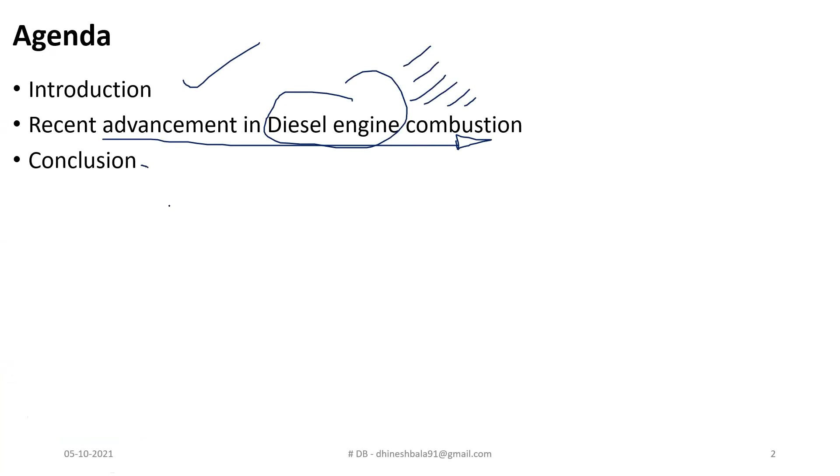Okay, thank you very much for this brief introduction. I would like to thank the management, principal, head of the institution, and the organizer for giving such an interesting opportunity to explore my perspective on advanced diesel engine combustion for clean combustion. The overall session is scheduled in this fashion: we will start with a brief introduction, followed by a walkthrough of recent advancements in diesel engine combustion and various concepts lying within advanced diesel engine combustion, and a brief conclusion.

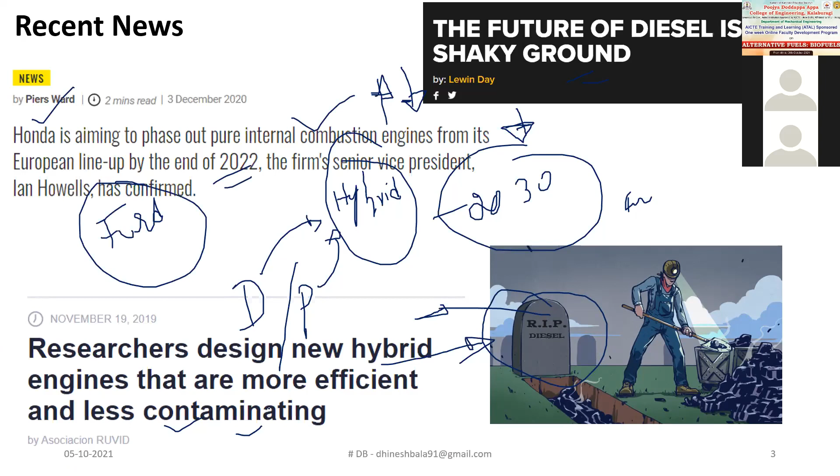Honda is aiming to phase out its pure internal combustion engines from the European lineup by 2022. You might have heard about the news related to Ford -- they have completely stopped production based on internal combustion engines as of now, and sooner or later Honda is also going to join them. All put together, they have started to signal the decline of the internal combustion engine at this point in time. Volvo added mild hybrid and plug-in hybrid vehicle models for all its variants, so sooner or later it is going to be for all vehicles.

In 2010, the internal combustion engine was ruling the entire automotive market share -- it was the only one ruling the entire market. But as the years went by, you can see the internal combustion engine slowly start to get phased out, and the role of hybrid vehicles and plug-in hybrid vehicles would start to play a key role. So it aligns with that.

As of now, we are in 2021. So by 2021, the penetration of hybrid vehicles should have initially started to reach a minimal percentage.

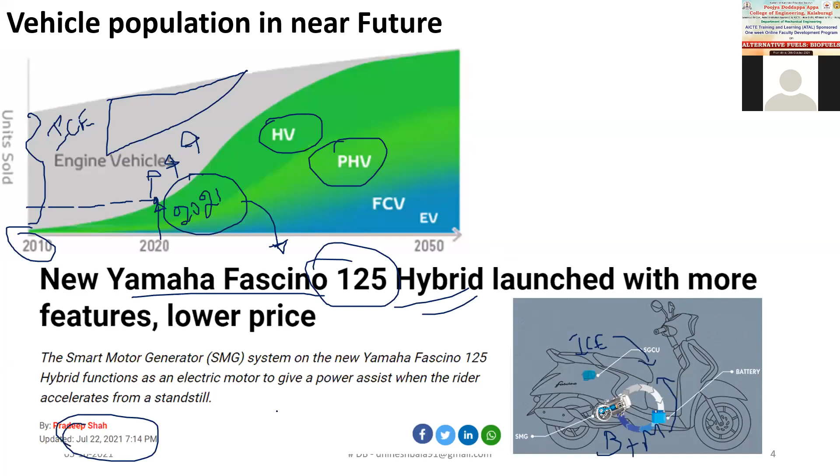In line with the statistical data I mentioned earlier, the Yamaha Fascino 125 is coming up with a hybrid vehicle mode. The term hybrid vehicle mode means it will have both an internal combustion engine and a battery-plus-motor combination, so power would be delivered from both the internal combustion engine and the battery-plus-motor combination. This news was out by July 2021. This statistical data is very much in line with whatever recent research and recent market share is happening as of now in India.

So after 2020, the penetration of hybrid vehicles and plug-in hybrid vehicles would...

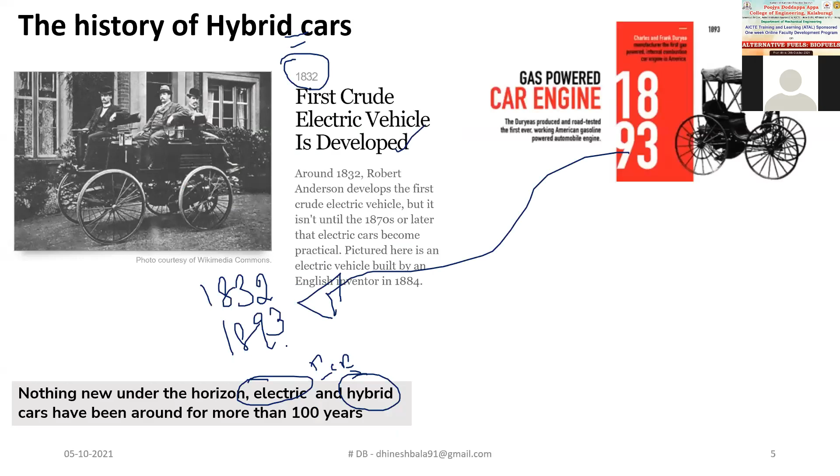It was in 1901 the first hybrid vehicle was introduced. If you just see all three vehicles' origin, it has been close, more or less in the same time scale. It was either in the late 18th century or the early 19th century. So the internal combustion engine, hybrid, and electric vehicle have started their origin around the same time, but somehow the internal combustion engine was ruling the entire market field for the past 100 years, from the 19th century to the 21st century, for more or less above 100 years.

But after that, people slowly started to transition from the internal combustion engine to either hybrid or electric vehicles. Even though the hybrid vehicle was introduced to mankind in 1901, it was in 1997 that the first mass production hybrid vehicle was initiated. The first mass production hybrid vehicle is nothing but the Toyota Prius, which was mass produced around the year 2000.

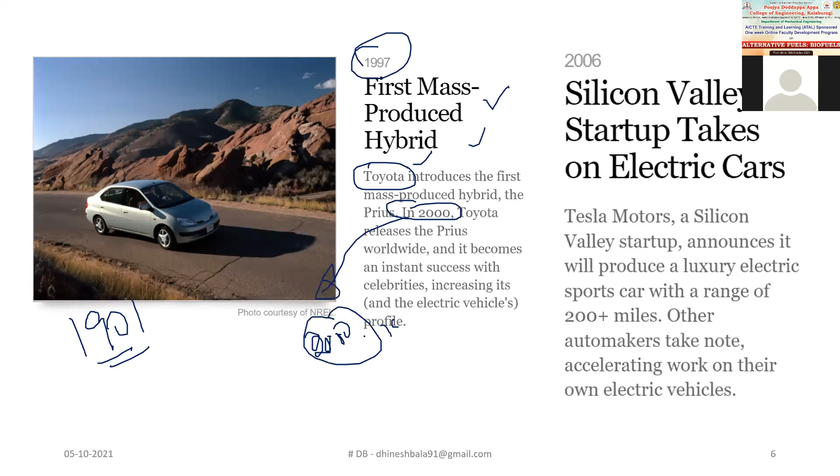So for the past 100 years, only the internal combustion engine was ruling the entire world. And after that, the hero of the electric vehicle comes into the picture. It was in 2006 that a Silicon Valley based startup made a very big statement to the entire automotive market field. This is nothing but Tesla Motors, a Silicon Valley based startup at that particular point of time.

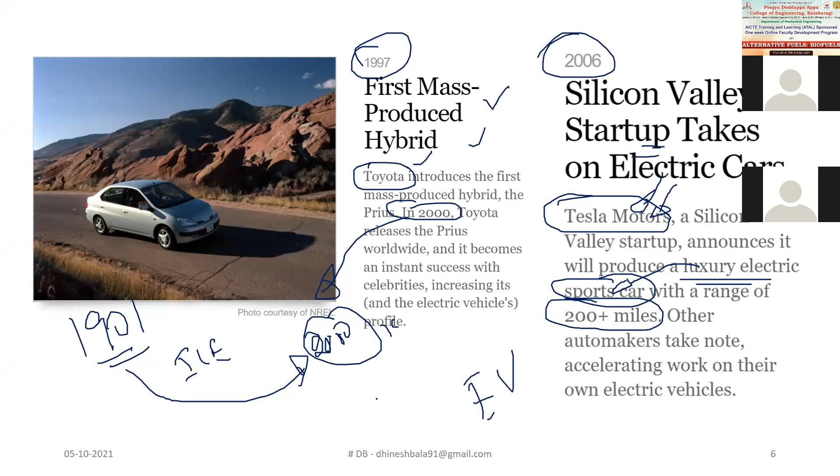This encouraged other automotive manufacturers to start working on their particular EV or hybrid vehicle variants. So this is all about the history of either the internal combustion engine, the hybrid vehicle, or the EV.

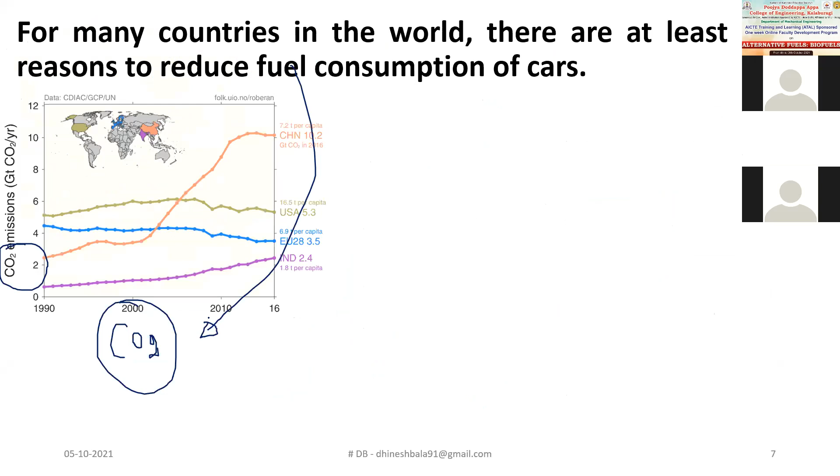So in many countries in the world, there are at least three reasons to reduce fuel consumption for cars. One major reason that strikes our mind is nothing but CO2 emission, which is a major threat in every nation as of now. When talking about fuel consumption, people more or less talk about carbon neutralization, and India is one of the most important countries targeting carbon neutralization.

Apart from that, the import duty of crude oil keeps on rising. Talking about import duty, it is led by China, followed by the US, and India is having a maximum share of crude oil import. So this import rate keeps on increasing and makes an impact.

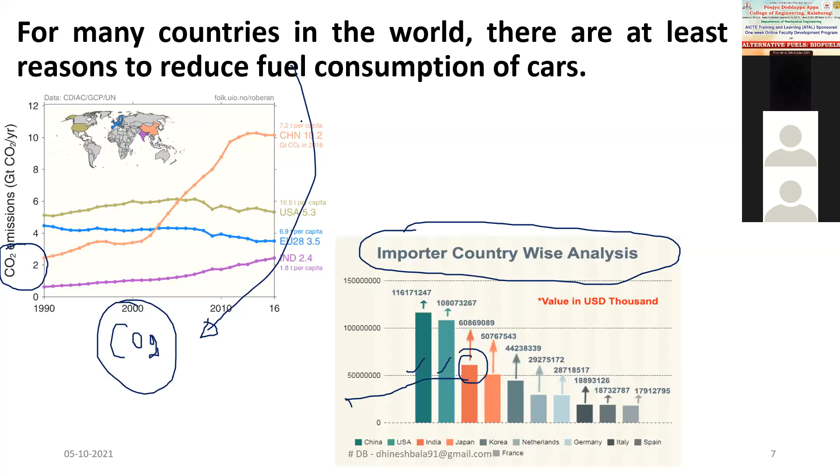So what are the possible ways to reduce this at a particular point? Talking about a pure internal combustion engine, you can rely more on the aerodynamic part of your vehicle, which will have a greater impact on drag, and thereby whenever you reduce your drag, you will have a higher option to increase fuel consumption efficiency.

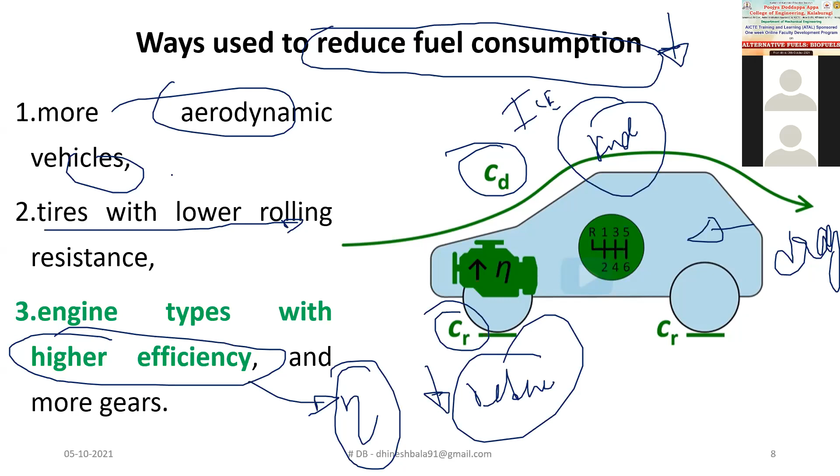The next important parameter is the tire with low rolling resistance, which would have a higher impact. The third one is the engine with higher efficiency. Our slide talks about this particular part where we will be focusing on a high efficiency engine with reduced fuel emissions using advanced combustion techniques in an existing diesel engine. So the possible ways to reduce fuel consumption as of now talk about the aerodynamic part, the rolling resistance part, and the third important key point is the efficiency of the engine.

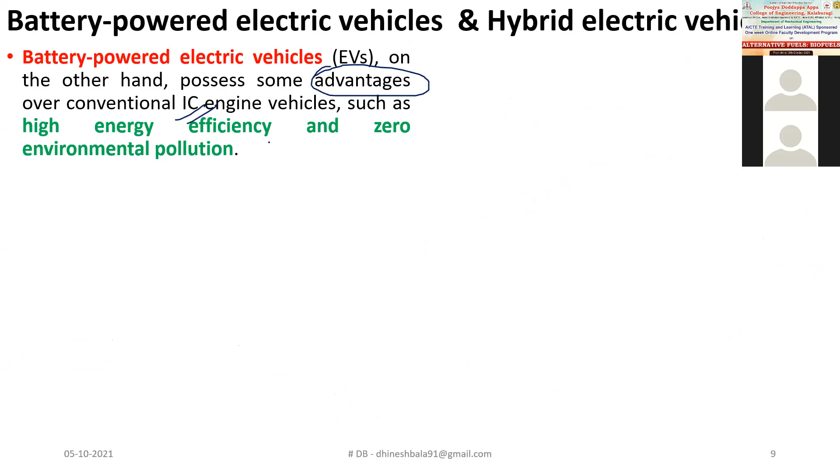So when talking about the battery powered electric vehicle, it possesses some advantages over the existing internal combustion engine, such as high energy efficiency and zero environmental pollution. You should be very clear about the term zero environmental pollution. When talking about the electric vehicle, people are slowly starting to switch from pure internal combustion engine to EV.

So when you switch over from internal combustion engine to EV, the demand for electricity keeps on increasing. When the demand for electricity increases, what actually happens is the demand on the thermal power plant gets increased - the demand for efficiency and reducing emissions.

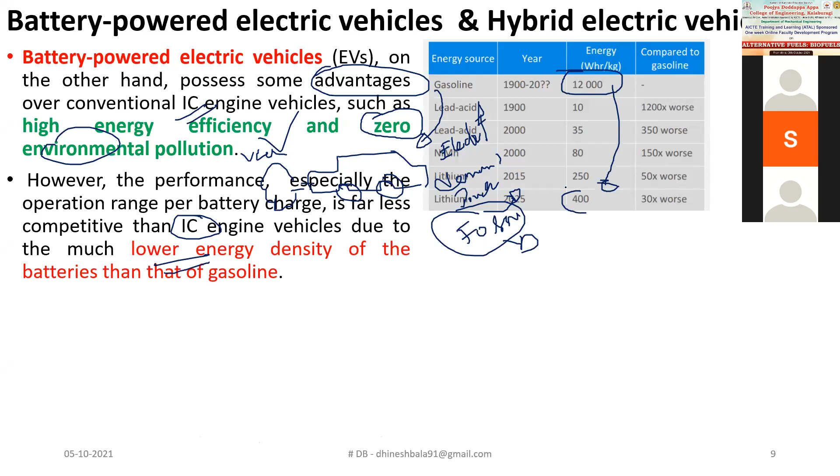The next point is, however, the performance, especially the operating range per battery, is far less compared to IC engines. This results in lower energy density of your battery than gasoline. The energy density of gasoline is enormously high, with no par equal to whatever the energy density of your lithium-ion batteries is. So we should be very much clear about why people have started making use of lithium-ion batteries as of now, because it has a higher tendency to lose an electron, and it would be much more efficient than the other electrochemical series values presently available.

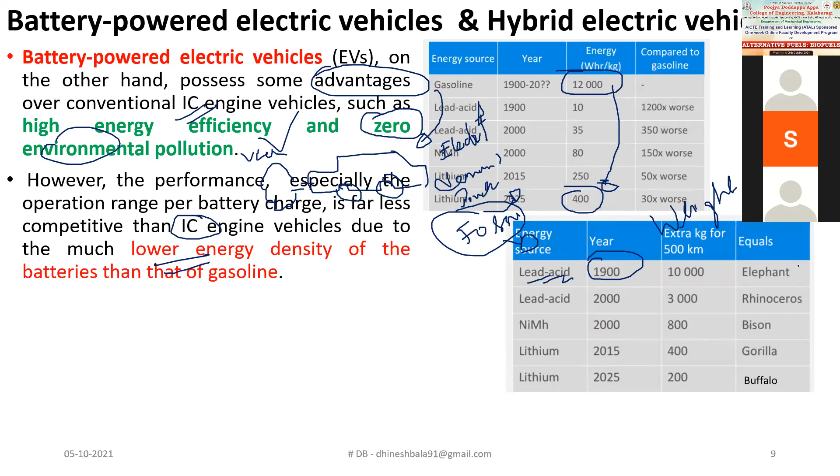Talking about one greater disadvantage, the energy density, the next thing that strikes our mind is nothing but the weight of the battery. In the early 20th century, people started thinking about making use of lead acid batteries. Whatever energy comparative to your internal combustion engine, at the same time it would result in a weight of an elephant that you'd be carrying along when traveling in your electric vehicle at that point of time. Already your vehicle would have a huge weight, because at that point, in the 20th century, there was no drastic material-focused engine design. So weight reduction was not a major concern at that point.

Even so, when working on a battery electric vehicle in the 20th century, it resulted in excess weight of the batteries. This weight of the battery has slowly stepped down from 10,000 kgs to 200 kg as of now. Even now, the battery weight is enormously high, but it is somehow equal to the weight of your internal combustion engine at this point. These are the greater disadvantages that strike our mind when talking about battery powered electric vehicles.

Taking these disadvantages and converting them into useful input, people started thinking about making use of hybrid vehicle technology. A hybrid vehicle uses two power sources, one is the primary power source and the secondary power source. The primary power source is always the internal combustion engine, and the secondary power source is your battery plus motor combination. This compensates for the disadvantage of your internal combustion engine, and you're able to enjoy the advantage of your battery powered EV.

Talking about the types of EV, it can be classified as a hybrid electric vehicle. This hybrid electric vehicle is further branched out as series, parallel, and a series-parallel combination. In a hybrid, you use two energy sources: one is the fuel plus internal combustion engine combination, and the next is the battery plus motor combination. In a hybrid vehicle, for refilling, you'll be making use of a petrol pump, and obviously you will also have a battery plus motor combination.

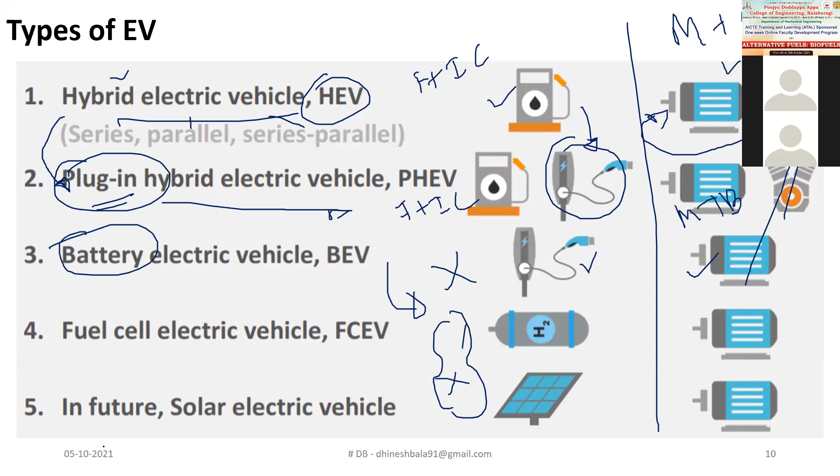When talking about the hybrid vehicle, it is mainly classified in terms of two parameters: one is by the degree of hybridization, and the other is by the energy flow.

Hybrid vehicles are classified by two terms: degree of hybridization and energy flow. In terms of degree of hybridization, it's classified as micro hybrid, mild hybrid, and full hybrid. So what is this degree of hybridization?

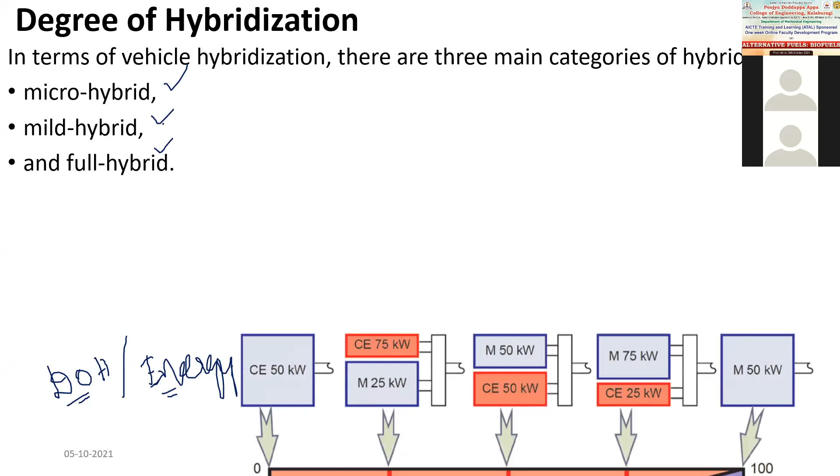The term degree of hybridization says how much electrical energy is delivered from your overall energy demand. Assume you have a hybrid vehicle, which makes use of both a combustion engine and a battery plus motor combination. The objective is you have an on-wheel demand of 100 kilowatt power for propulsion of your vehicle.

If this 100 kilowatt power is delivered only from your pure internal combustion engine alone, then your degree of hybridization is 0%. If instead this 100 kilowatt power is delivered only from your battery plus motor combination, then your degree of hybridization is 100%. So 100% degree of hybridization is nothing but the pure battery electric vehicle, meaning your on-wheel demand is delivered only by the battery plus motor combination. The in-between percentage talks about the degree of hybridization.

If you have a demand of 100 kilowatt power, and 75% of power is delivered from your internal combustion engine while 25% is delivered from battery plus motor combination, then your degree of hybridization is 25%. If battery plus motor contributes 50%, then your DOH is 50. And if it is 75, your DOH is 75.

At any point, the degree of hybridization would not exceed 50%. You will try to understand why it doesn't exceed 50%, because if the percentage exceeds 50, then the primary energy source would become the battery plus motor combination, and the secondary energy source would become the internal combustion engine.

The main objective of hybridization is to keep your internal combustion engine alive, and to do that the percentage must stay at 50%. So at no point of time would they exceed 50% exactly — it would be 49.99%. At any point of time, the percentage of power delivered from your battery plus motor combination would not exceed 49.99%. If it exceeds 50...

...then the battery plus electric motor would become your primary energy source, and the internal combustion engine would become the secondary energy source. This is just to make the hybrid a mild hybrid or full hybrid.

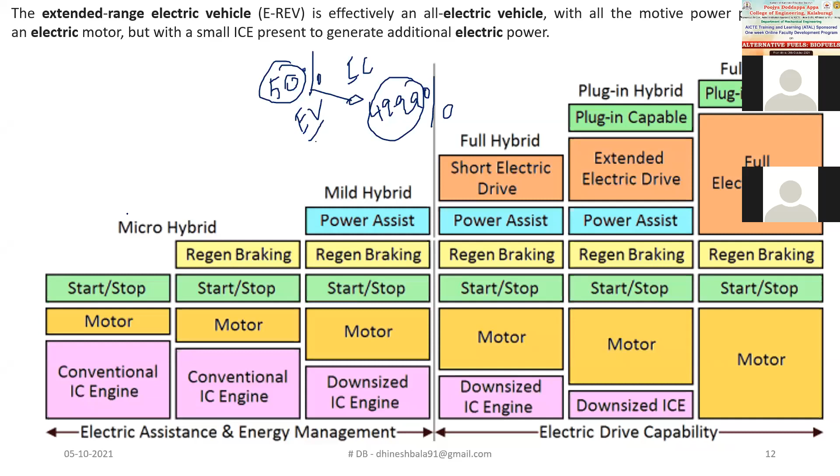Whatever vehicle exists as of now in the automotive market is all micro hybrid vehicle. Think about the vehicles that you have in your home, for example the TVS XL. For your TVS XL, you will have a kickstart option — you need to kick and start your vehicle. Similarly your older Scooty Pep or Scooty model would have a kickstart option.

When talking about this micro hybrid, you will have an existing internal combustion engine. Apart from that, you will have a motor. This motor will assist in starting and stopping your vehicle. So this is what the micro hybrid talks about.

All the two-wheeler vehicles as of now in your market fall under the category of micro hybrid, which has a degree of hybridization of 0 to 10% at the maximum. These vehicles have a very minimal percentage. So rather than using the power of the internal combustion engine, just by using a starter motor, you try to start your engine externally with the assistance of a battery plus motor. This is what talks about the micro hybrid.

Apart from start and stop operation, the motor assists with start and stop, and it is also able to make use of regenerative braking to charge your battery. At the time of braking, your motor would act as a generator, creating an impact on the impedance of the motor that results in the possibility of producing current, which can be effectively used to charge your battery. This is what talks about the regenerative motor — it assists you for start and stop operation, and also for regenerative braking mode.

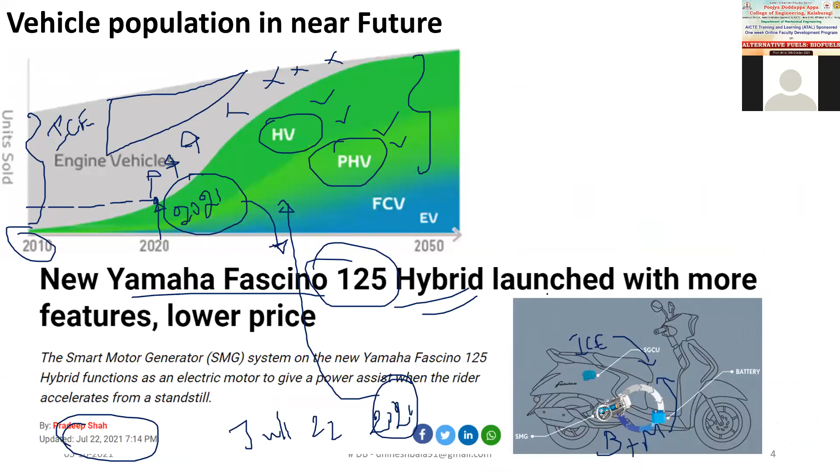Apart from the motor used for start-stop operation and regenerative braking, it would also assist you with a power assist option. This power assist means, assume you're at a signal with a Scooty Pep nearby. Let's take this vehicle itself as an example - the Yamaha Fascino 125cc, which is a hybrid vehicle. Assume at that traffic signal, a Fascino vehicle is present, and a geared vehicle is present.

What happens is the signal turns green, so the person tries to accelerate. At this point, the wheel demand would be raised. In this case, power would be delivered from both your internal combustion engine and from the battery plus motor combination to handle this wheel demand. So the acceleration would be higher compared to this nearby vehicle. At this point, it would assist you for start-stop operation, regenerative braking, and apart from that, it would assist as a power assist component.

So this talks about the mild hybrid based vehicle. And when you switch over from micro hybrid to mild hybrid, you need to downsize the engine. So this is one of the key concepts when talking about hybrid vehicles.

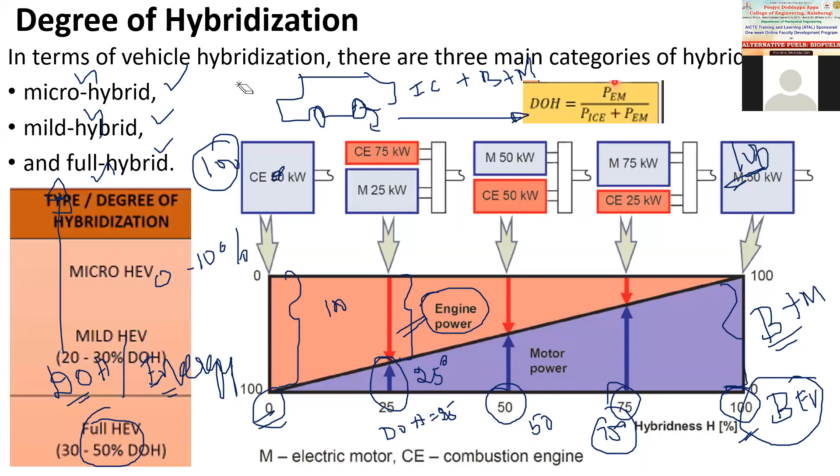Assume you're having a vehicle which weighs around nearly 200 kg for an assumption. It is a pure internal combustion engine vehicle, and you have been asked to convert it into a hybrid vehicle. When trying to convert it into a hybrid vehicle, you'll be trying to add a battery plus motor combination into it. So what happens is the weight of the vehicle would get increased. Assume the weight increases by 100 kg, so the weight is 300 kg.

Whatever benefit would be wasted because of this increase in weight. So to reduce this weight, what they will try to do is work on different components present in your existing vehicle. One main conceptual idea is downsizing the engine. Downsizing the engine has nothing to do with the engine performance - it won't pull down the performance of the engine. Simply, it is a method to reduce the weight of the engine.

Unless and until you keep the weight of your internal combustion engine and hybrid vehicle same, you won't be able to enjoy the advantage of your hybrid vehicle mode. So the main objective of engine downsizing is to reduce the weight of your internal combustion engine, to enjoy the advantage of your hybrid vehicle mode to the minimum possible way, and achieve the best power to weight ratio. The best option for power to weight ratio can be achieved only by this.

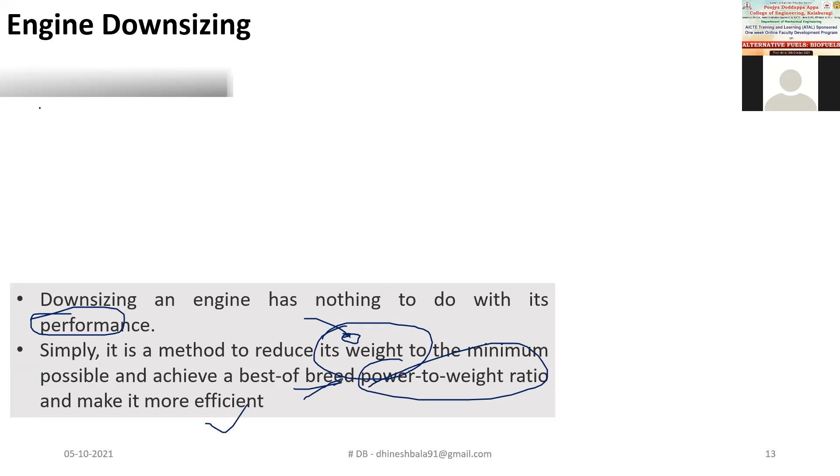That talks about - assume your internal combustion engine would have a weight of around 65 kg, which would be able to deliver a power of more or less 65 kilowatt. What we'll try to do is reduce the weight of your engine. So rather than 65, here it would be 55, and more or less it would deliver the same power output. So the weight has been drastically reduced and there isn't a very big deviation in the power. This is what talks about engine downsizing.

One thing that can be achieved is just by introducing a turbocharger into your engine. That is the reason why most vehicles as of now are coming with either a turbocharger or supercharger incorporated into it - the main reason being engine downsizing. This is a pictorial representation of a wastegate turbocharger, and people are also working on variable geometry turbocharger to enhance the power output by reducing the weight of your engine. So this talks about engine downsizing.

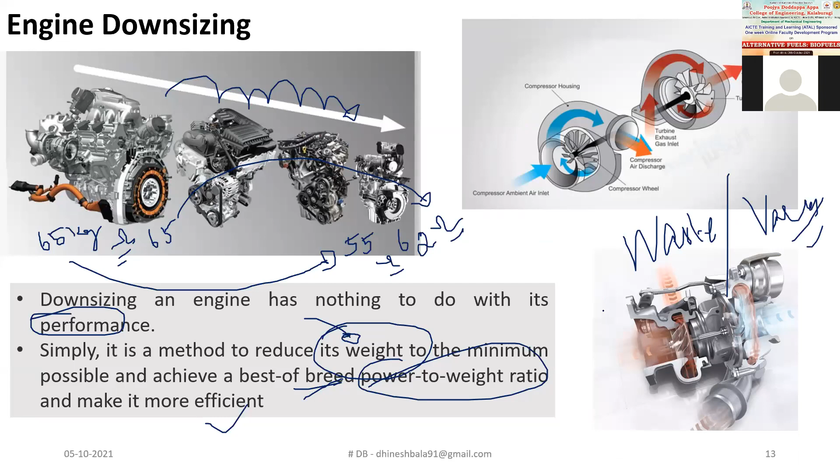Moving back to the classification, we discussed micro hybrid, mild hybrid, and after mild hybrid, people started to think about full hybrid. In mild hybrid, the degree of hybridization would be up to 30 percent, and for full hybrid it would be 49.99 percent. That means based upon on-wheel demand, only 49.99 percent of power would be delivered from the battery plus motor combination, and the remaining power would come from the internal combustion engine.

The main idea behind this hybridization is to keep the internal combustion engine alive for the next 20 to 30 years, so it survives only by the name of hybrid vehicle. They have tried to downsize the engine, whatever we've seen earlier. From the conventional engine, they minimally reduced the size first, and after that reduced it drastically.

So the term downsize comes into picture. After that, they further reduced the size of the engine. Moving from full hybrid to plug-in hybrid, they downsized the engine to an even greater percentage. When working with this downsized engine at maximum percentage, the efficiency of the engine should be much higher than the conventional internal combustion engine.

So what are the possible ways to increase efficiency, and what are the possible ways to work on advanced emission control techniques, is what the upcoming slide is going to focus on.

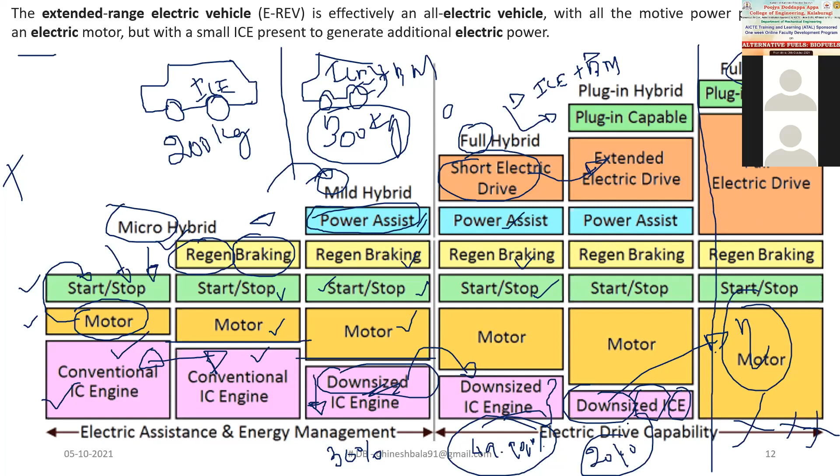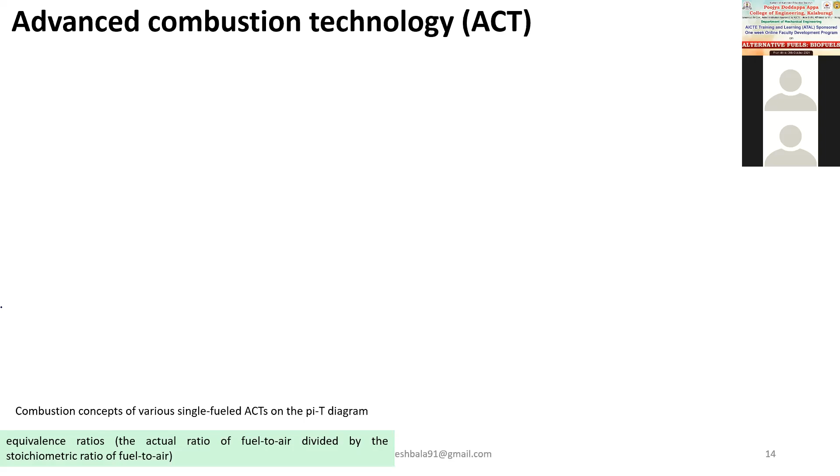We discussed what engine downsizing is and the key component present for engine downsizing. The overall objective, when focusing on engine downsizing, is to increase the efficiency of the engine and reduce emissions to a greater percentage. One such technique of increasing efficiency and reducing emissions is advanced combustion techniques.

They have coined this advanced combustion technique as ACT. The better trade-off between emission regulation and improving efficiency talks about advanced combustion techniques. ACT is a novel combustion concept which makes it possible to reduce NOx and PM simultaneously.

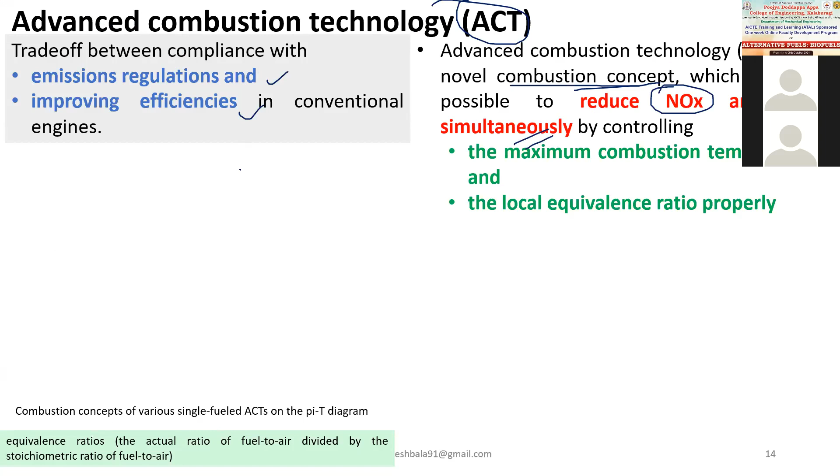You should clearly understand the soot-NOx curve initially. When you're able to understand the peninsula of soot and NOx in an optimal percentage, you can understand this advanced combustion technique in a much better way.

This talks about the equivalence ratio, which is nothing but the ratio between the actual fuel-air ratio to the stoichiometric fuel-air ratio. When it is exactly 1, you are at the stoichiometric point. When the values keep increasing, the mixture is getting rich, and when the values fall below 1, you are getting a lean combination.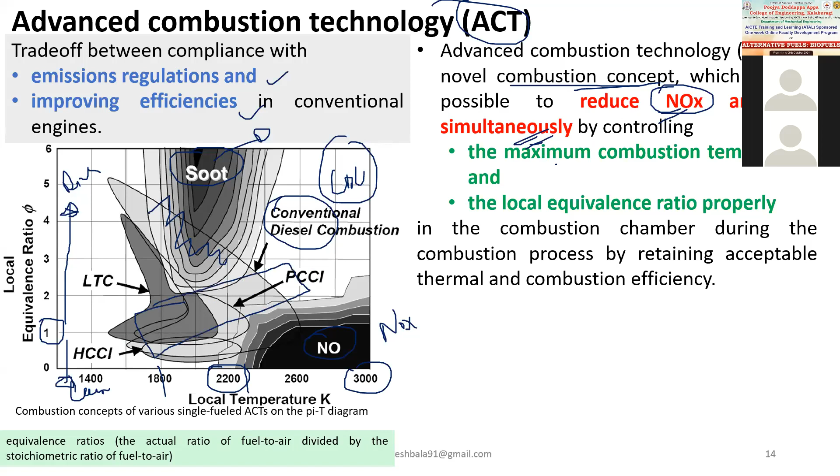That means you need to focus on the area in between the soot and NOx profile. So this is the area we need to focus on, the maximum combustion temperature and creating a better mixture of fuel and air in the combustion chamber during the combustion process, while retaining acceptable thermal and combustion efficiency.

One such technique is low temperature combustion. In low temperature combustion, the focus is more on a massive EGR percentage rather than creating a better fuel-air mixture. The next concepts are the homogeneous charge compression ignition engine, and the premixed charge compression ignition engine.

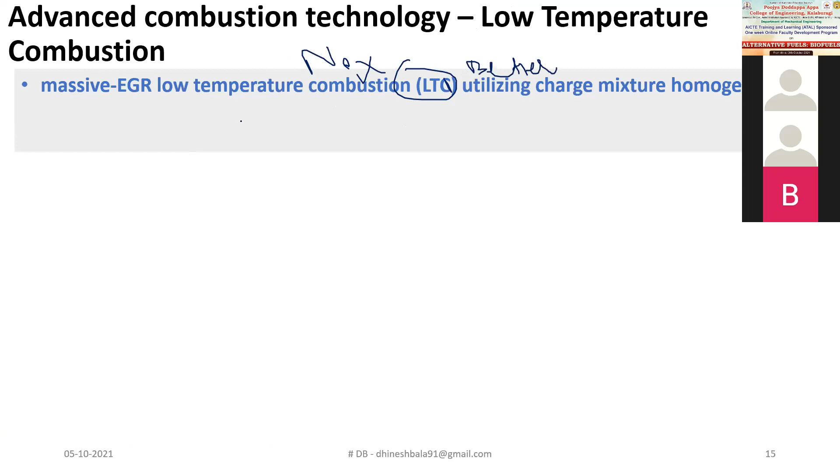Let's start with LTC. The massive EGR percentage in LTC creates reduced NOx and better mixing than the advanced or existing CDC combustion concept. The LTC region exists in the low temperature range below 2200 Kelvin and a local equivalence ratio of 4. The maximum range lies between an equivalence ratio of 4, and the maximum temperature range lies well below 2200 degree Kelvin.

This combination would be able to reduce NOx by a greater percentage. To achieve this, the EGR percentage in LTC would range between 50 to 70 percent, though it might vary from 30 to 70 percent at maximum. Normally, it will be closer to 50 percent in case of LTC.

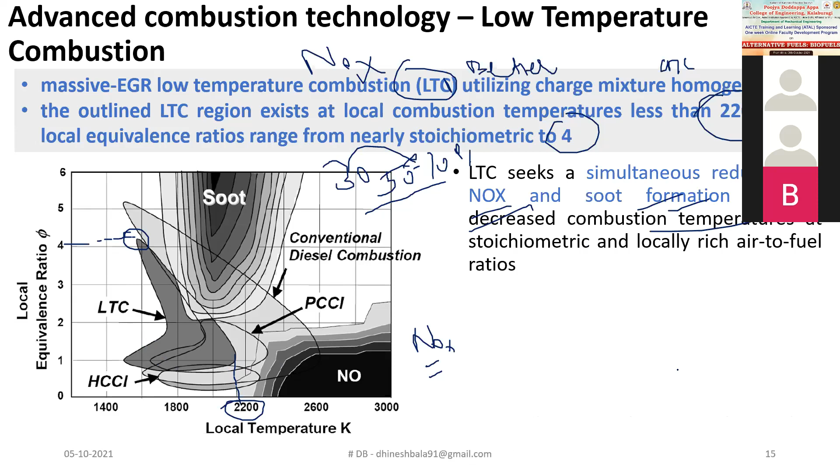LTC seeks simultaneous reduction in NOx and soot formation through decreased combustion temperature. Decreasing the combustion temperature and enhancing the better mixture would avoid soot formation to a greater percentage, and dilution with air or exhaust gas would create better EGR circulation, which would reduce the high temperature zone in the entire combustion chamber.

All put together, you will be able to lay off the region of NOx formation and have a better combustion trade-off between soot and NOx profile. This is the earliest stage of advanced diesel engine combustion concepts, where we have a better trade-off between NOx and soot, and extensive research has also been done with respect to EGR-based LTC combustion techniques.

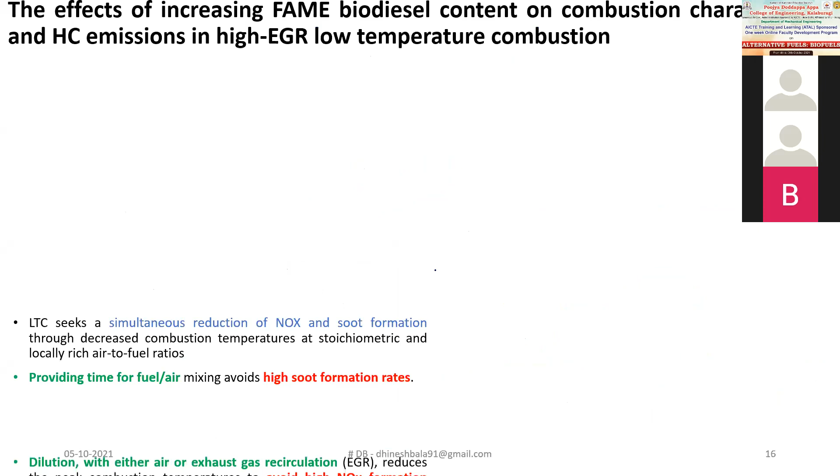The effect of increasing biodiesel content on combustion characteristics and HC emission in high EGR, low temperature combustion was studied. Once you increase the EGR percentage, it would result in low temperature zone formation, and thereby you will be able to achieve a low NOx formation at any point of time.

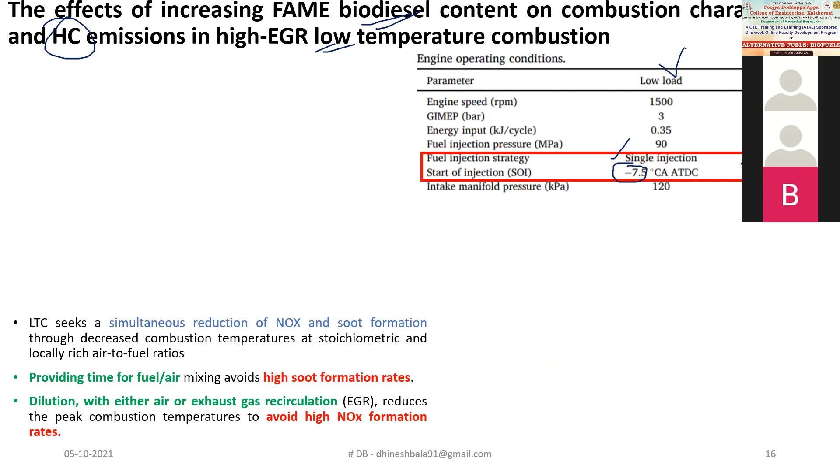In the case of low temperature heat release rate, this results in better mixing, which pulls down the soot emission to a greater percentage. After that, the low temperature combustion formation results in reduced NOx formation. All put together, you can achieve a reduced soot and NOx trade-off, and if you are able to achieve a better soot and NOx trade-off, it would result in enhanced thermal efficiency. This is what low temperature combustion concept talks about.

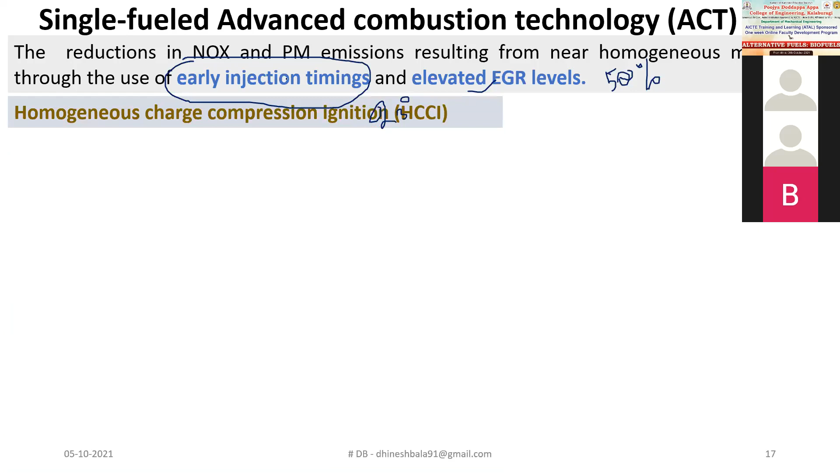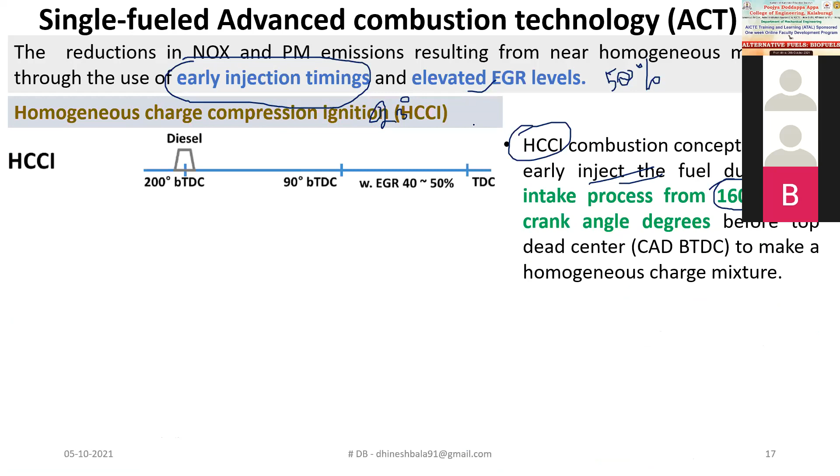One is the homogeneous charge compression ignition engine. This concept presents the early injection of fuel, in which fuel is injected at a crank angle of 160 to 120 degree before top dead center. This is the top dead center, around 360 degree, so from there before 160 to 120 degree. For assumption, I've considered 200 degrees before top dead center, which would be more or less the end of suction, resembling a gasoline engine. That is why they coined this technique as homogeneous charge compression ignition engine, where you try to inject the fuel at the suction stroke itself.

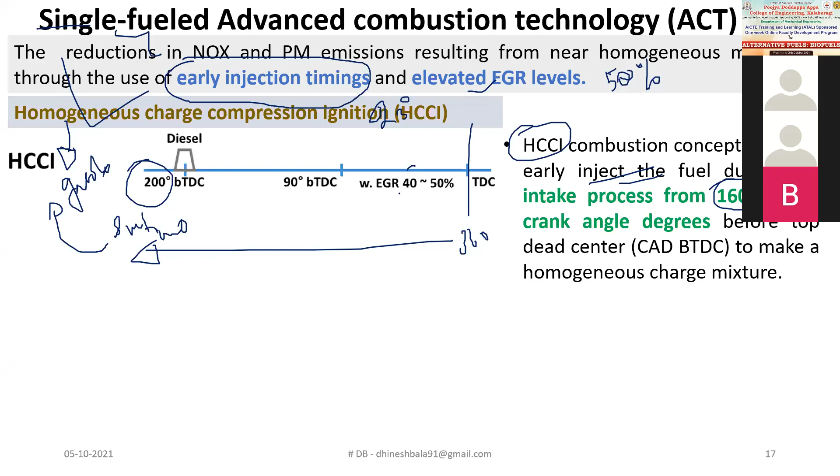Thereby there is higher potential for better fuel air interaction, combined with enhanced EGR percentage. You can eliminate the locally rich air-fuel mixture condition and reduce PM emission, and the higher EGR percentage results in low NOx formation.

The only disadvantage in HCCI is the higher possibility for formation of CO and HC emission to a greater percentage, because there is higher possibility for knocking since you are injecting the fuel well before the suction stroke. There would be better fuel air mixture, but sufficient temperature might not be attained at that point of time. That is why the profile of LTC falls well below 1400 degree Kelvin, and when temperature falls below that, there is higher possibility for CO or HC emission. That is one of the greater disadvantages of HCCI engine.

To overcome HCCI, people started to think about PCCI engine. For your information, all these are single fuel techniques. In PCCI, earlier we injected fuel at 200 degrees, more or less in the suction stroke. Now people inject fuel not closer to TDC, but in the mid of the compression stroke, either as single injection or multiple injection. Here I've made a 3 injection closer to the mid of compression stroke, at 90 degree before top dead center, with EGR percentage close to 30 to 50%.

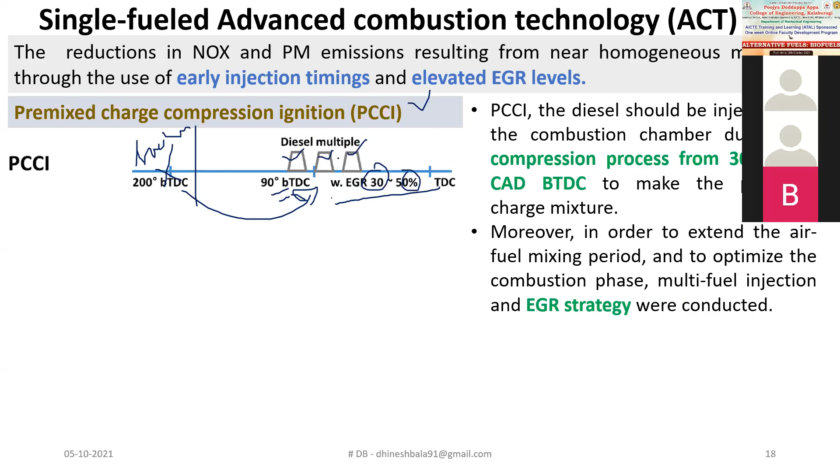With earlier injection resulting in better fuel air interaction, soot emission falls down. With higher EGR percentage, you can pull down NOx emission to a greater percentage, resulting in reduced NOx formation. This is the soot peninsula, and here is the NOx peninsula. The zone in between is what we need to focus on much more.

Conventional diesel engine combustion is red in color, which affects both soot and NOx to a greater percentage. Initially we talked about LTC, which won't affect soot and NOx formation much, but results in lower thermal efficiency. Then people started to think about HCCI, but it has higher possibility for HC and CO emission because the local combustion temperature zones fall below 1800 Kelvin in the peninsula. As of that, people started to think about PCCI, which gives somewhat better combustion than HCCI, with enhanced local fuel air ratio and enhanced temperature range, having minimal impact on NOx emission since the overall temperature range is increased compared to HCCI based engine.

I hope now you have a clear vision about the soot NOx peninsula and the single fuel ACTs. And this talks about your conventional diesel engine combustion.

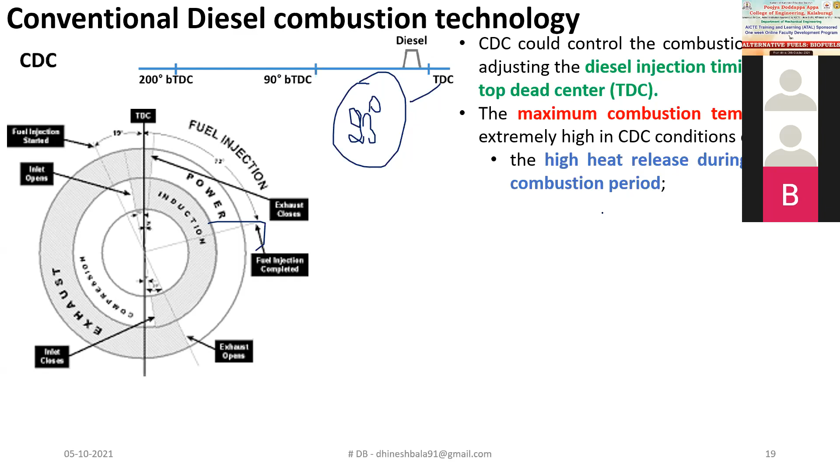In case of conventional diesel engine combustion, your fuel will be injected close to top dead center. Most often, people do research with fuel injection at 23 degrees before top dead center. The main disadvantage here is that it results in a higher heat release rate and shorter combustion duration, which reduces thermal efficiency.

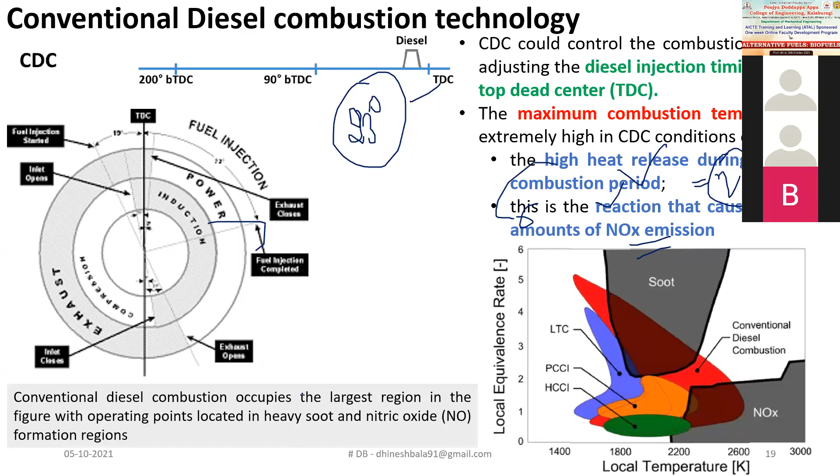As you have a higher heat release rate, there's a huge possibility for the formation of NOx. This might also result in higher soot formation, due to a richer fuel mixture at full load condition. So all put together, these are the greater disadvantages.

But to monitor the combustion phase, the only options we have in conventional diesel engine combustion are introducing a shim to vary the injection timing, and varying the injection pressure ranging from 200 bar to 300 bar. These are the only two techniques that can effectively control the combustion phase, but this can be dealt with much better in advanced diesel engine combustion.

So even the single fuel ACTs fail to a greater percentage in controlling the combustion. The single fuel ACTs have difficulty controlling the combustion phase because we rely on one particular single fuel, whether diesel, biodiesel, or whatever fuel you pick, and maintaining combustion stability was enormously tedious, with the operating range restricted to one particular zone.

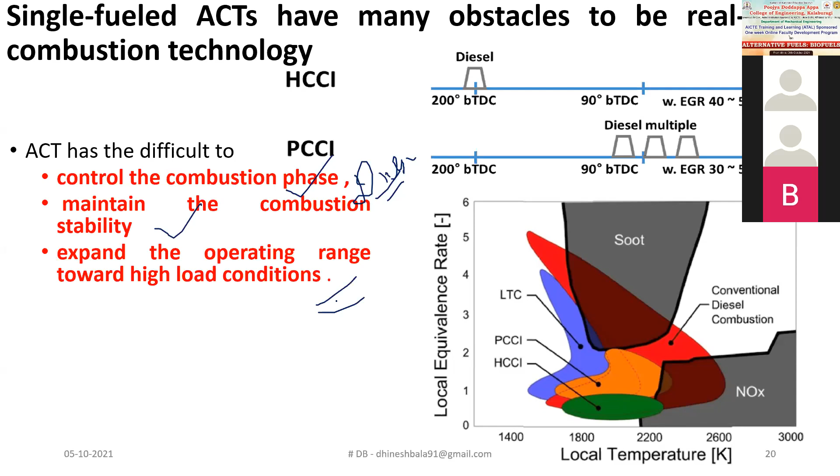So extending the operating range towards high load condition is really impossible. Moreover, they also produce higher HC formation, since the temperature range falls below 1800 Kelvin, and CO emission formation is achievable. This results in incomplete combustion.

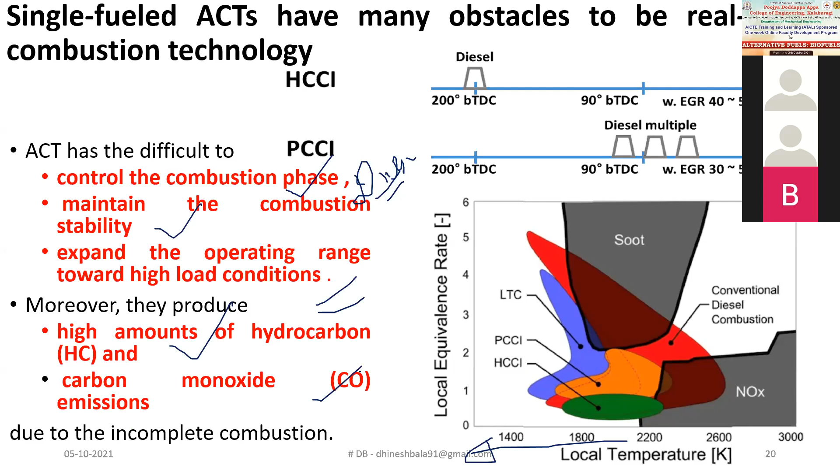So after that, in 1983 HCCI was introduced, and in 1995 PCCI was introduced. But the commercialization of HCCI took nearly 20 plus years to get commercialized. It was commercialized only in 2007, and after that the RCCI engine came into picture.

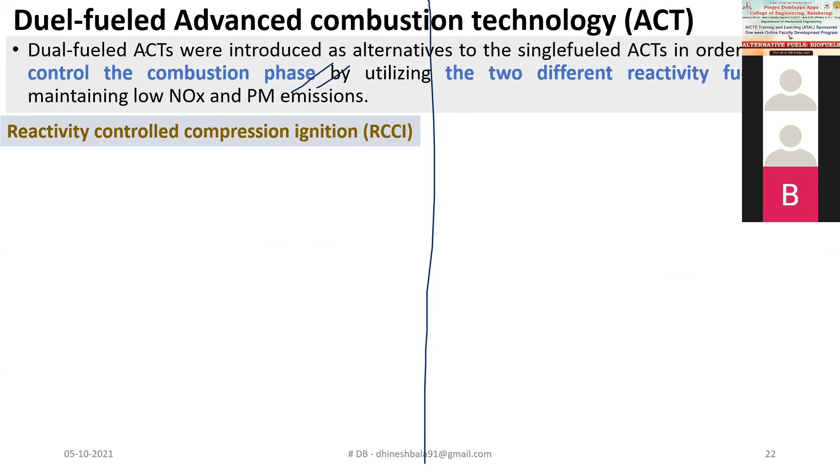So the dual fuel ACTs were introduced as an alternative to the single fuel ACTs, to better control the combustion phase by utilizing two different fuels in the combustion zone while maintaining low NOx and PM emissions. So thereby the RCCI and pilot fuel dual fuel injection come into picture.

In case of pilot fuel, what we have is you will be injecting the diesel closer to the top dead center, and the EGR percentage lies between 40 to 50 percent, and you will be injecting the gaseous fuel at the end of the suction stroke or even during the suction stroke. So this is what talks about the dual fuel engine.

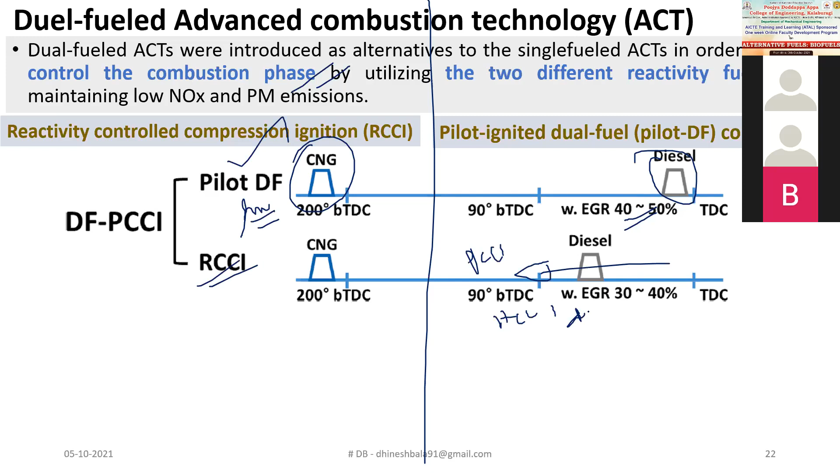And talking about the RCCI engine, the injection timing would not be closer to TDC. You will have a different injection timing than the previous case. So either it can be in PCCI mode or HCCI mode, or it can be either single injection or split injection, based on mass injection and based on timing. There are n number of classifications that fall under this RCCI category, clubbing with the single fuel ACTs.

So in case of RCCI, the combustion control would be able to control the combustion phase with better fuel reactivity and the formation of stratification, and it would be able to control the fuel mass ratio between the high reactive fuel, which can be diesel, biodiesel, whatever it is, and low reactive fuels such as alcohol and gases, which would be highly preferred. The process involves introducing a low reactive fuel into the cylinder at the suction stroke itself, or at the time of the intake manifold.

So create a well mixed charge of low reactivity fuel with the air, so that will pull down the soot formation and have a better EGR percentage, and high reactivity fuel will be injected close to top dead center or at the mid of your compression stroke. This can be either single or multiple split based on mass, timing, and different strategies. You just try to inject this particular fuel into your combustion stroke.

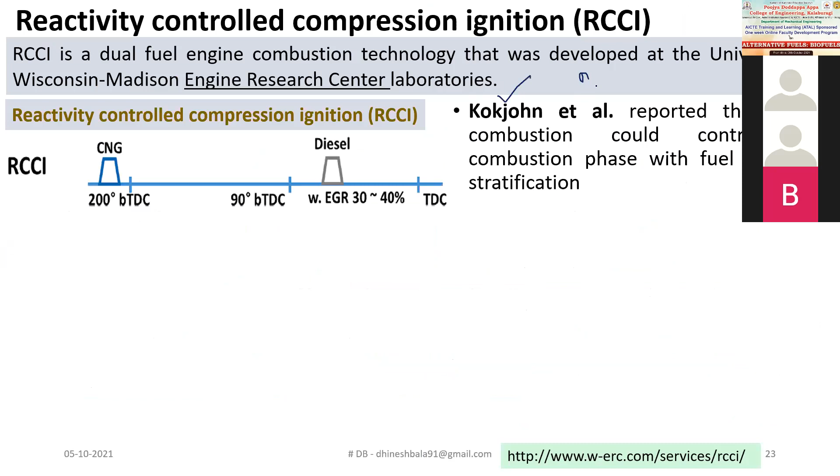So this is what talks about RCCI. We need to thank the University of Wisconsin Madison and their engine laboratory for the invention of the RCCI engine. The overall credit goes to Kokjohn, who initiated this RCCI engine idea in 2008. Here he used both low reactivity fuel and high reactivity fuel, and with that he was able to control the combustion phase to a better percentage than the previous advanced technique.

Here the low reactivity fuel would be injected along with the air into your combustion zone, so the air fuel mixture would be placed inside your diesel engine. Just by introducing the high reactivity fuel, ignition would occur, resulting in lower soot and lower NOx emission. They tried to achieve an efficiency close to a range between 40 to 50 percent, reported while working on one particular speed and load condition. This is based on experimental data from their own experimental condition, but with this we can achieve very high thermal efficiency with reduced soot and NOx percentage.

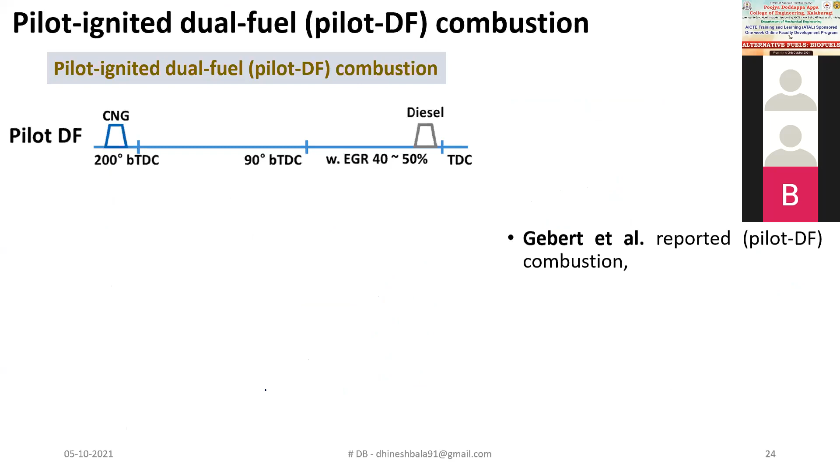Talking about the pilot fuel diesel engine, in this particular case it is nothing but a modified diesel engine. In this existing diesel engine, what we try to do is inject the gaseous fuel into the intake manifold, and you will have the EGR. This EGR can be either high pressure, low pressure, cold EGR, or hot EGR. There are different types of EGR, but the overall objective is to pull down the temperature and have a better fuel air mixture, resulting in reduced soot or PM emission and reduced NOx emission to a greater percentage.

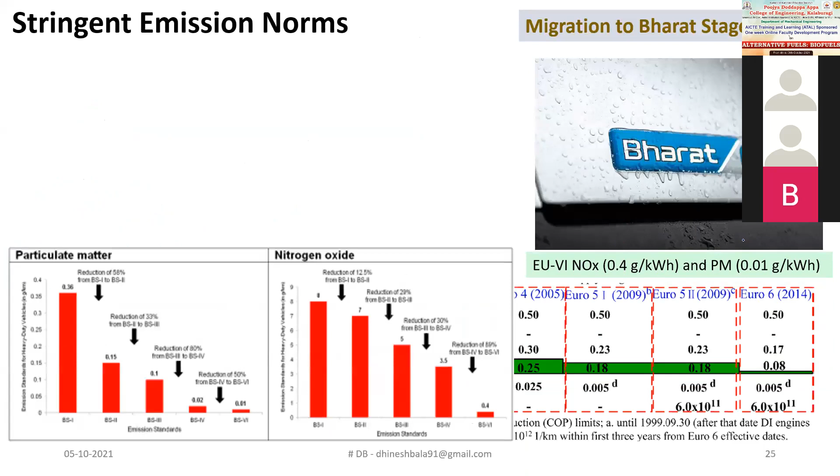The overall objective of Euro 6 norms talks about 0.4 gram per kilowatt hour for NOx, and PM talks about 0.01 gram per kilowatt hour. Earlier it was around 2.7 for CO, 0.97 for HC plus NOx, and 0.14 for PM.

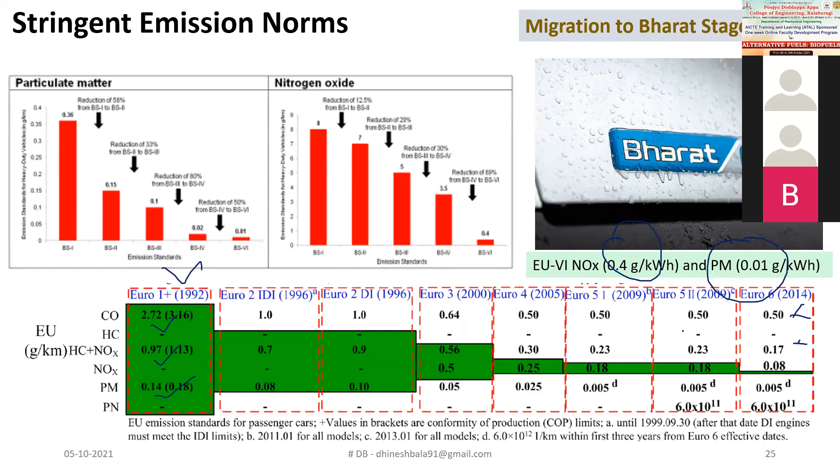But now people are not even targeting HC, CO, or even NOx as much; they are focusing more on only PM emission. That has stepped down from 0.14 to 0.01, and NOx is not as of now coupled with HC for emission. Initially NOx was not taken into account, and as of now the NOx percentage has reduced from 0.5 to 0.4 at this point in time.

So all put together, we are focusing more on the emission parameter, particularly in BS6, and even further emission norms would be much more stringent. To meet these much more stringent emission norms, we need to focus on more advanced combustion techniques and develop ourselves to keep this internal combustion engine alive for the upcoming years.

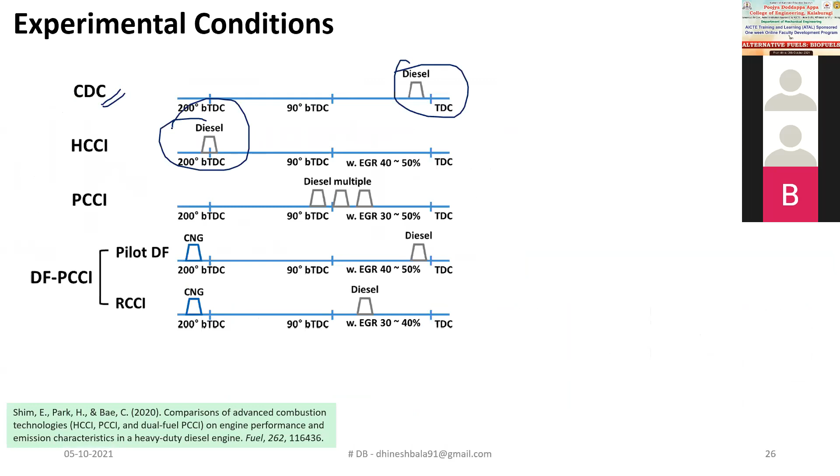So I have given you a brief study that covers all of these in one single case. CDC, where the fuel is injected close to TDC. HCCI, where diesel is injected during suction. PCCI, with a 3-split injection in the mid of compression. And pilot, where you have gaseous fuel in the intake and diesel closer to top dead center, or gaseous fuel in the intake with diesel more or less in the mid of compression.

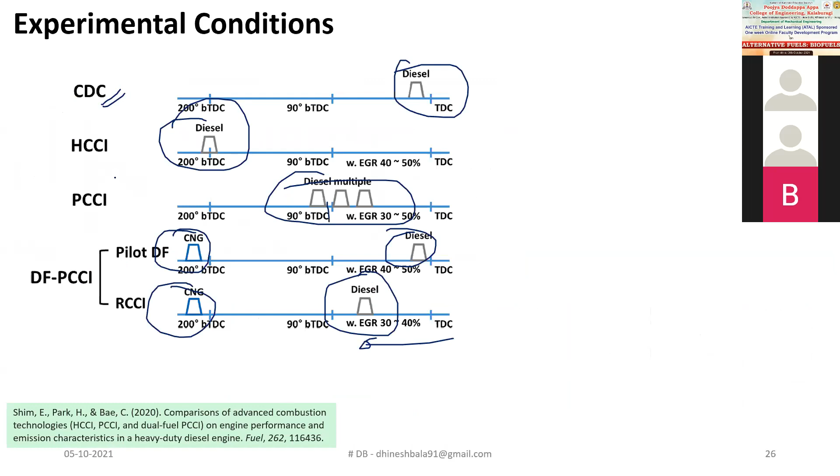These are the 5 modes of operation, and this gives you the pictorial representation of the experimental study, including the EGR and natural gas percentage. For the single fuel ACT, HCCI, the start of injection would be minus 200; for PCCI it would be in the mid of compression; and CDC closer to top dead center. For pilot fuel and RCCI, the percentage of natural gas would get varied. RCCI is more or less the resemblance of your PCCA, and CDC is more or less the resemblance of your existing CDC.

So the modified diesel engine is nothing but the pilot based dual fuel setup. For this experimental study, I considered a combustion chamber which is re-entrant in profile. I believe you are very much aware of the re-entrant bowl, which gives better fuel air interaction and reduces soot emission. It also has a massive EGR percentage, ranging from 30 to 50 percent, along with gaseous injection, and I made use of cold EGR, which is actually a high pressure EGR in this particular case.

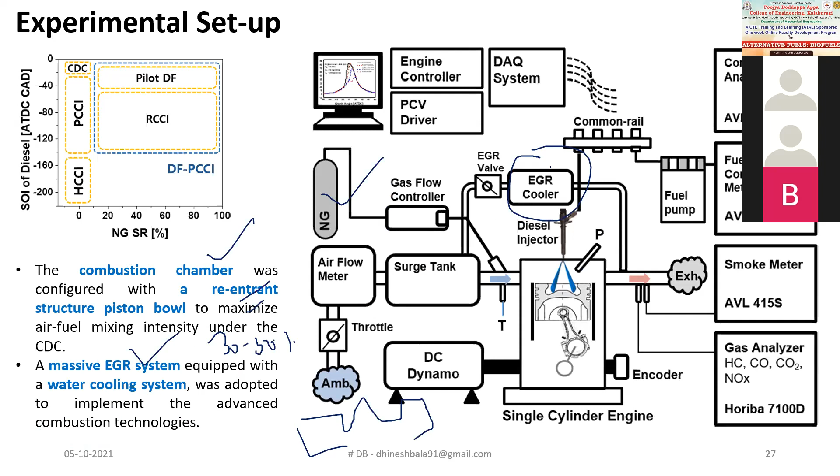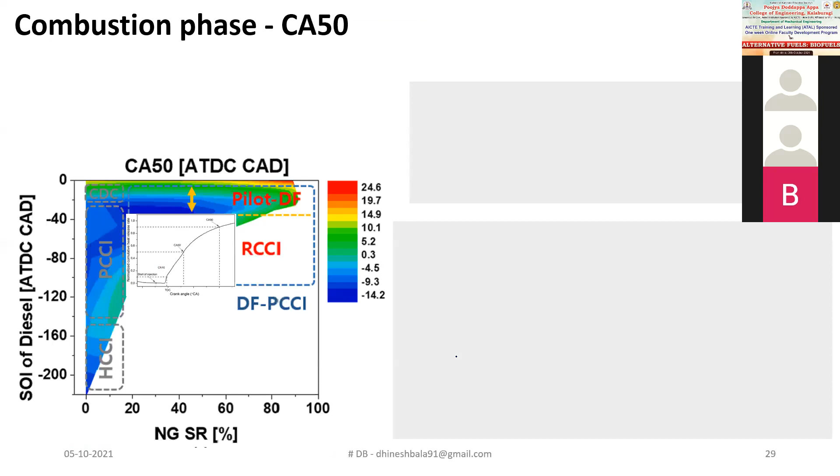Based upon this particular study, both the combustion performance and emission data has been carried out. So let's start talking more about the combustion parameter in a broad way.

Here I have just presented the crank angle 50 of the engine case study. If you see this crank angle percentage 50, it should be closer to the range of minus 5 to 5 degrees. When the crank angle 50 percentage reaches its peak between minus 5 to 5 degrees of your overall entire crank angle, that means it would result in an enhanced thermal efficiency. So if you see the CDC percentage, it has just been optimized for the formation of 5 degrees after the top dead center, and that would be able to achieve in both your pilot fuel DF.

But when you're just moving from CDC to PCCI, the crank angle percentage is falling even to minus 14 degrees. This results in a deteriorated phase of combustion, and when there is a deteriorated combustion, it would result in higher formation of HC and CO. We will be able to understand this further in the upcoming slides.

So PCCI is blue in color, which ranges the crank angle of minus 14 degrees, and HCCI is even further. But just with the aid of CDC or pilot fuel DF and RCCI, you will be able to achieve a better crank angle 50 portion, that is either ranging between minus 5 to 5 degrees. Thereby it may result in superior thermal efficiency.

CDC could easily control the combustion phase by adjusting the injection timing and obviously the injection pressure. So just by varying the SOI, you can try to control the combustion in case of your CDC.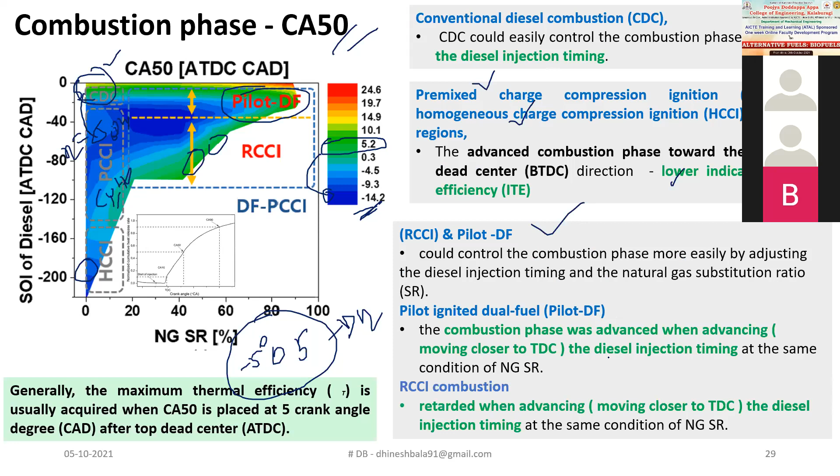Talking about pilot fuel tactics or RCCI, the combustion phase was advanced when moving towards the TDC, along with the diesel injection timing and your NG SR percentage. When you're trying to advance the injection timing and increase the primary fuel injection, you are able to see the formation of green color over here, meaning it has a better CA50, between minus 5 to 5 degree crank angle.

RCCI says that when you try to retard it and increase the NG SR percentage, there is a higher possibility or formation of green color, between 0 to minus 5 degree crank angle. So this is the idea behind the CA50 profile, and that would result in superior thermal efficiency.

Next, let's talk about the ignition delay. The ignition delay in your conventional diesel engine is somewhat nominally good, because the conventional diesel engine is already optimized for its existing operation. So the ignition delay in your conventional diesel engine would vary from 8 to 15 degree crank angle.

The conventional CDC has a lower ignition delay, followed by the PCCI. They try to couple dual fuel PCCI and RCCI together. So in between this particular zone, the CDC or dual fuel tactics result in an optimal ignition delay.

But when you try to inject the fuel merely 90 to 100 degrees before the top dead center, what actually happens is that the ignition delay would get increased. If you're trying to inject the fuel well before the top dead center, the temperature inside the combustion zone would be very minimal, so that won't be able to convert your liquid into vapor and create a better fuel-air mixture.

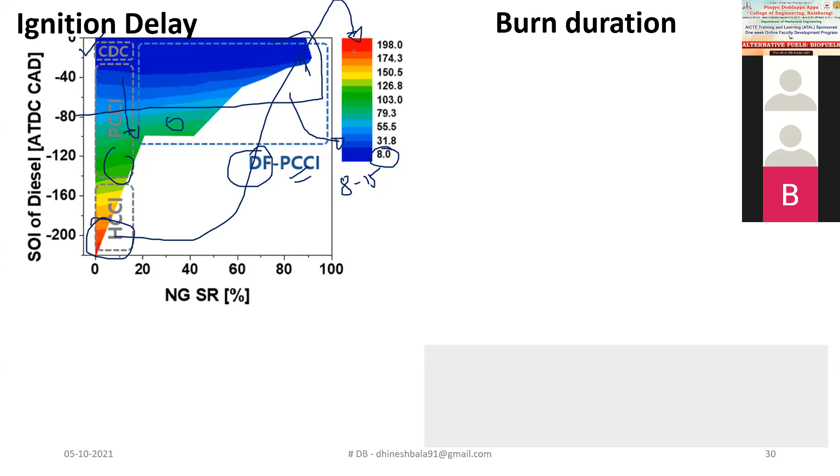That is the reason why there is formation of very high ignition delay at this particular zone, and it would reach its peak particularly in HCCI, because you are trying to inject the fuel even at the suction stroke itself. So when you're injecting during the suction stroke, think about the pressure and temperature inside your combustion zone. So all put together, the ignition delay would be enormously high when talking about HCCI and the later part of your PCCI.

So ignition delay was increased by advancing the diesel injection timing in all combustion chambers.

In terms of burn duration, that is normally CA10 to CA90. The burn duration should be as short as possible, resulting in superior thermal efficiency. The duration would be stated between minus 5 to 90 degrees. The longer burn duration would deteriorate thermal efficiency, leading to a huge possibility for heat transfer losses and lowering the constant pressure combustion part.

There is an insufficient region between 100 to 120 degrees before TDC, this is the particular zone I have mentioned. Particularly between 170 to 100 degrees before TDC, which relies on the HCCI PCCI concept with very high burn duration. That means the burn duration is enormously high, merely 50 degrees crank angle. If the burn duration is enormously high, it would deteriorate the combustion to a greater percentage.

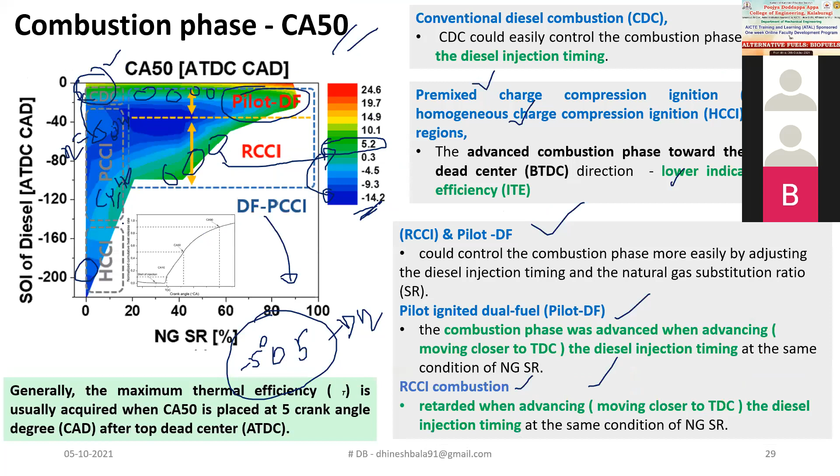So you need to try to sync all these parameters in a single unit. The burn duration is higher, the ignition delay is higher, and the CA formation over this particular zone is enormously high. So all put together, thermal efficiency will fall down, and that would result in higher HC and CO emissions.

Next, talk about the COV IMEP variation. The COV IMEP variation should not exceed 5 to 10% of an individual cylinder. CDC recorded a minimal percentage of 1.5%. This 1.5% is more or less reliable for CDC and dual fuel combustion concepts, but merely till 80 degrees before TDC, PCCI would be able to sustain. But after that, the percentage varies from 5% to 13%, and all put together, thermal efficiency would fall down.

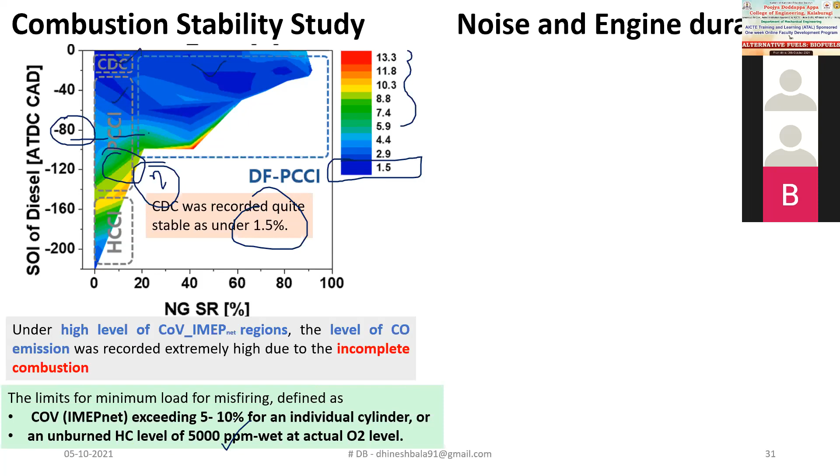CDC is nothing but the formation of HC percentage in the overall combustion zone, with unburned HC level of 5000 ppm wet at actual oxygen level. That is what talks about the COV IMEP variation. If the variation is too high, it would result in incomplete combustion formation, putting down the thermal efficiency to a greater percentage.

Next is the engine durability study. This engine durability study talks about the maximum pressure rise values between the previous pressure and crank angle values. If this pressure and crank angle values exceed 10 bar per degree crank angle, it would result in higher vibration and formation of knocking in the existing engine.

When you see this very keenly, only in PCCI and the mid part of your dual fuel ACTs, that results in a very low percentage of engine durability, engine noise and durability study. But either in CDC or the earlier part of your advanced dual fuel ACTs, that results in a higher percentage of the peak rise rate, the maximum pressure rise rate, causing an engine irregularity creating excess noise inside the engine.

MPRR was recorded extremely high, nearly 20 bar per degree crank angle, which is enormously high because the maximum limit is only 5 to 10. Nominally it would vary around 8 for your CDC. If it is moving to 20, that means the engine would keep on vibrating. So if you try to vary the injection timing, you can work on this particular noise and engine durability study with respect to your maximum pressure rise curve itself.

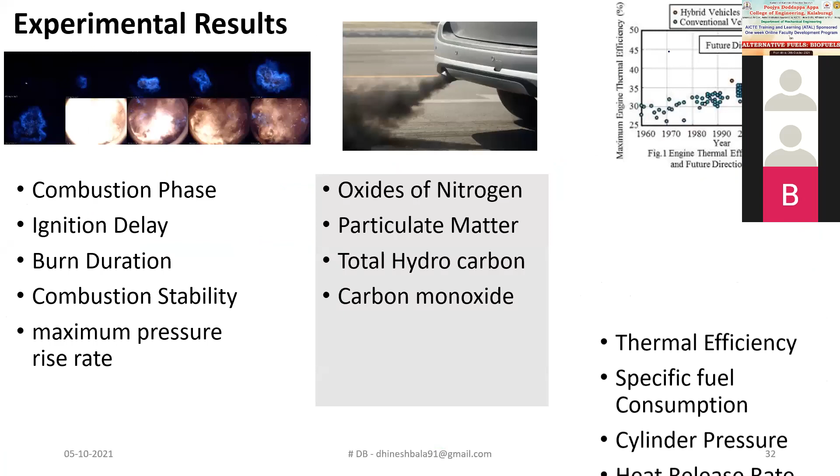Next, moving into the emission part, our key objective is focusing on the soot and NOx trade-off. You can see the NOx formation as the thermal efficiency of CDC and the earlier stage of PCCI or dual fuel PCCI result in superior thermal efficiency, thereby the NOx formation is enormously higher in this particular zone. Whereas when dealing with HCCI or the later stage of PCCI, you can achieve very low NOx — here you can see the NOx percentage is very minimal.

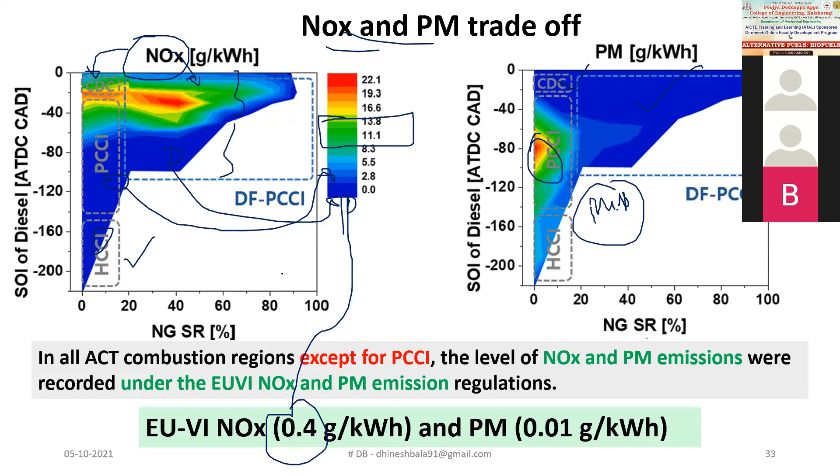The optimal NOx percentage suggested is 0.4 gram per kilowatt hour. So when you're just focusing only on NOx, you can try to run your engine in this particular zone. But for better efficiency, you need to focus on the zone in green color. Looking at soot, in single fuel ACT or dual fuel ACT, you can achieve very low soot formation because you're varying the injection time. But in certain zones of your PCCI, there's a higher possibility for misfiring, which creates higher soot formation due to low-temperature combustion inside the combustion zone. So that covers the NOx and PM trade-off.

I've also presented the HC and CO formation. For advanced diesel engine combustion techniques, HC emission for CDC is very low because thermal efficiency is higher, and PCCI would also result in lower HC formation. But dual fuel PCCI would result in lower HC formation, whereas PCCI and HCCI result in very low thermal efficiency and increased HC and CO formation. There's a greater disadvantage with HCCI and PCCI based engines, and similar resemblance in CO emission profile. The main reasons are blow-through, crevice, and bulk quenching. This bulk quenching results in higher HC and CO emissions in single fuel ACTs, particularly PCCI and HCCI. That can be much better controlled when moving to dual fuel ACTs.

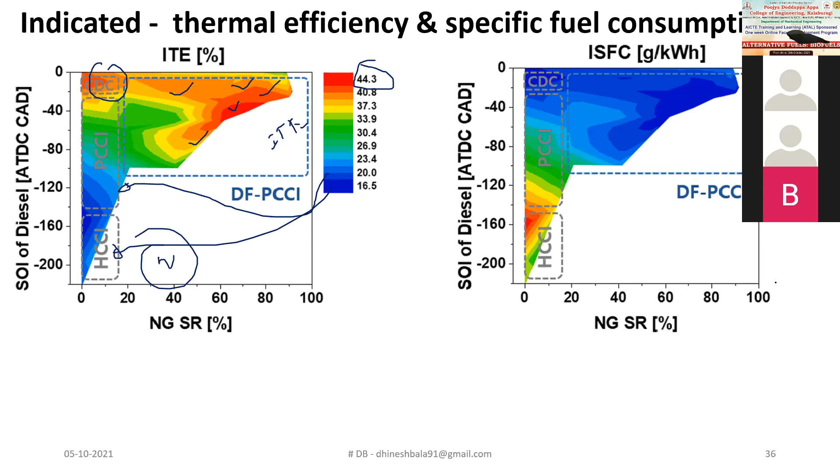Moving to the next experimental study, which is thermal efficiency. The indicated thermal efficiency for CDC is closer to 44.3 - note this is indicated thermal efficiency, I have not calculated brake thermal efficiency. That value has a regional impact on dual fuel ACTs also, but thermal efficiency is much lower, particularly in the later stage of PCCI and completely in the HCCI zone. The NOx reduction in HCCI would be enormously high, so focusing on NOx, HCCI is the best option, but focusing on thermal efficiency, HCCI is the worst option. Fuel consumption would also be enormously high in HCCI and PCCI zones, resulting in very low thermal efficiency.

When focusing on CDC, you'll get superior NOx formation and very low PM formation. But switching from CDC to PCCI, NOx formation is much lower, but there's nominal soot formation. From PCCI to HCCI, you can further reduce NOx, but PM formation is higher, and higher PM formation results in higher HC and CO formation. Talking about dual fuel PCCI, you can drastically reduce PM emission and soot emission.

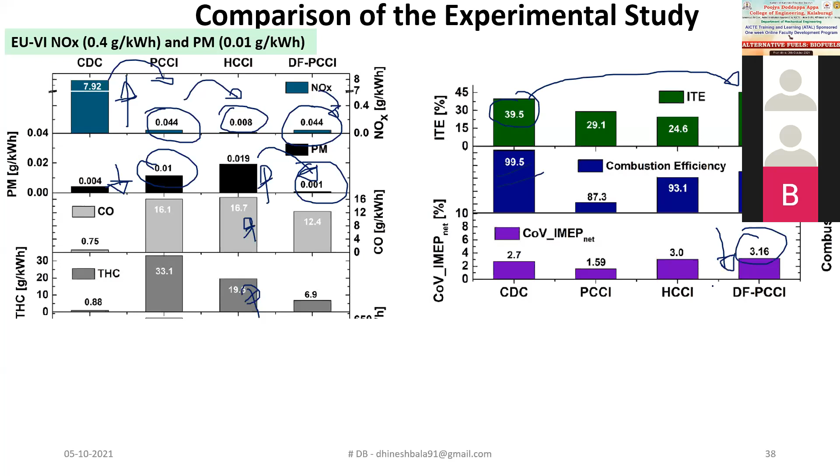That's why RCCI and advanced dual fuel PCCIs are highly interesting at this point in time. Talking about indicated thermal efficiency, you'll have better thermal efficiency compared to conventional diesel engine combustion, and combustion efficiency would be more or less the same. The COV of IMEP percentage is also well below 5%, resulting in better combustion data for advanced diesel engine combustion.

The main takeaway from this presentation: when focusing on single fuel ACT, you can achieve low NOx and superior PM reduction, but it's very hard to control the combustion phase, resulting in lower thermal efficiency, higher CO2 formation, limited operating range, and higher HC and CO formation. But switching from single fuel ACT to dual fuel ACT, you get low NOx and PM with better combustion phase control with diesel, because by varying injection timing and pressure you can control the combustion phase in dual fuel ACTs. Thermal efficiency is closer to CDC, the existing engine, or even slightly higher, and CO2 reduction is achievable, but only at low load conditions - you can't run this advanced combustion technique at high load.

It would result in the same soot formation again, and this might also sometimes result in higher HC and CO when operating at high load or full load conditions.

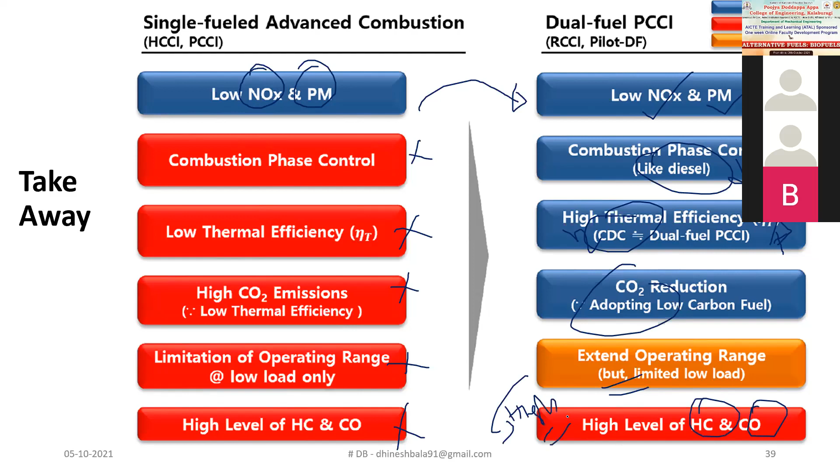So this is the key takeaway from this particular presentation. I hope I didn't bore you much, giving certain information about advanced combustion techniques that are present at this particular point of time in hybrid vehicles.

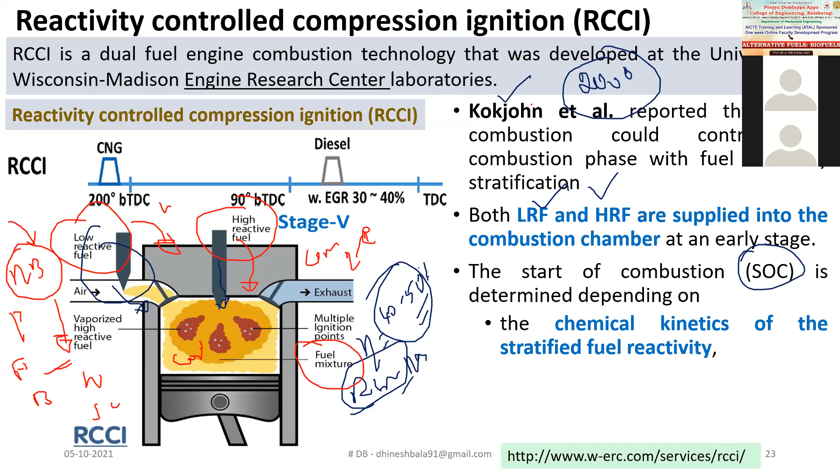Okay sir. Any questions, sir? Any other participants? Any other questions? Okay, thank you sir. Thank you very much sir.

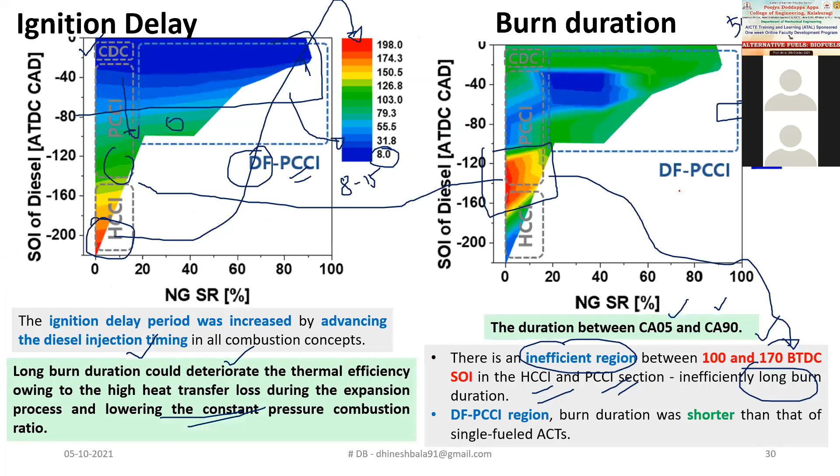Have a nice day, thank you sir. Thank you, Dr. Dhinesh Balasubramanian sir, thank you for your presentation, it was very helpful sir. Thank you sir, any other participants, any other questions? Okay sir, thank you sir. We are about to end the session.